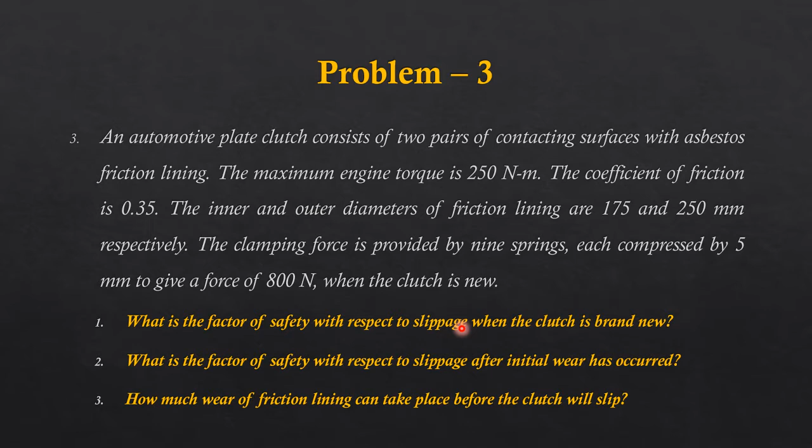The axial force or the force of engagement is provided by 9 springs. Each spring will deflect by 5 millimeter to give a force of 800 Newton, which is necessary to keep the clutch engaged. Right? And initially the clutch is new. Right, so for this problem we need to find out the three parameters, factor of safety for both brand new clutch as well as initially worn out clutch, and we need to find out the maximum wear before the clutch will slip. All right, so we will look into the data and then into the solutions in the next slides.

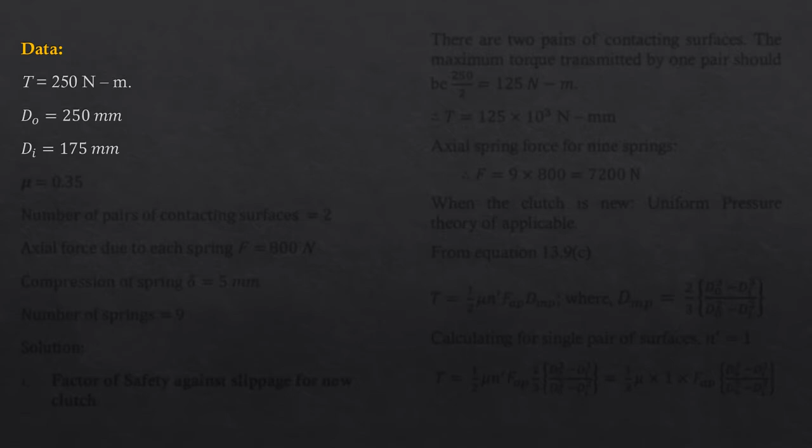All right, so let's look into the solution now. Data for problem number 3 is as follows. The torque that is transmitted is 250 Newton meter for two contacting surfaces. Outer diameter is 250 mm, inner is 175 mm. Coefficient of friction is 0.35, right? And the number of pairs of contacting surfaces is 2. And the axial force provided by each of the springs is 800 Newton. And deflection or compression of each spring is 5 mm. Number of springs is 9. So these are the data that we have.

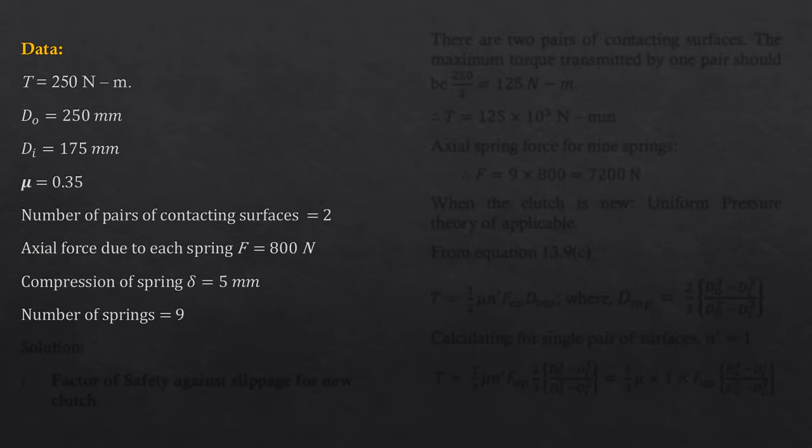Now let us look into the first parameter which they have asked us to determine, which is factor of safety against slippage for new clutch. Right, now before we solve the problem, let us look at how to solve this problem. Okay, now when you say factor of safety against slippage, factor of safety we know is maximum by induced, isn't it? Right? The maximum torque that can be transmitted for a single plate clutch is dependent upon both uniform wear or uniform pressure theory. But here they have asked us to find out factor of safety against slippage for new clutch. And we have learnt that for new clutches, it is uniform pressure theory that works well.

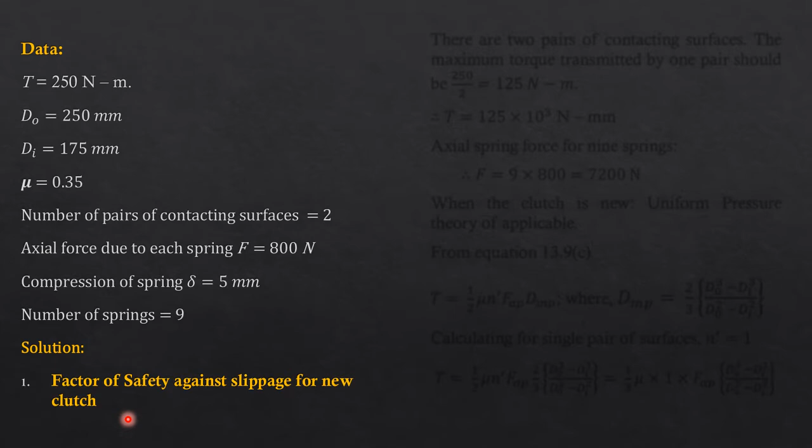Right? Therefore, we will use uniform pressure theory and solve for the torque carrying capacity of the clutch. Divide that by the torque that is transmitted, which in this particular case, for one pair of contacting surfaces, will be 250 by 2, right? So divide the maximum torque that is obtained using uniform pressure theory by the torque transmitted, and you will get the factor of safety, right? And if the factor of safety is greater than 1, we know that the design is safe. All right, therefore let us go through the solution now.

Solution for calculating the factor of safety against slippage for new clutch. Right, now as I was saying, the torque that is transmitted here is 250 Newton meter for two contacting surfaces. Therefore, per pair it will be 250 by 2, 125 Newton meter. That is the torque. And then each spring is supposed to exert 800 Newton of force. Therefore, for 9 springs, it will be 7,200 Newton. Therefore, you know the torque T and you know the axial force 7,200 Newton.

And since the clutch is new, we will make use of uniform pressure theory. For uniform pressure theory, we have a formula 13.9C, which is given here. Now substitute all the parameters here and you will get the value of the maximum torque transmitting capacity of the clutch, right? Now that we will calculate in the next slide.

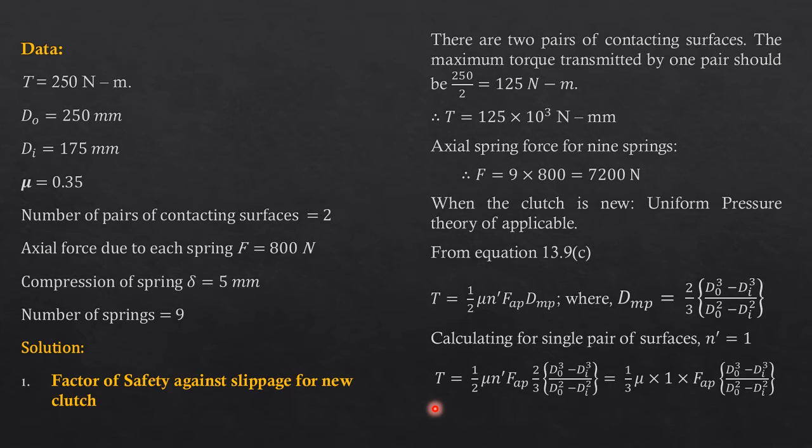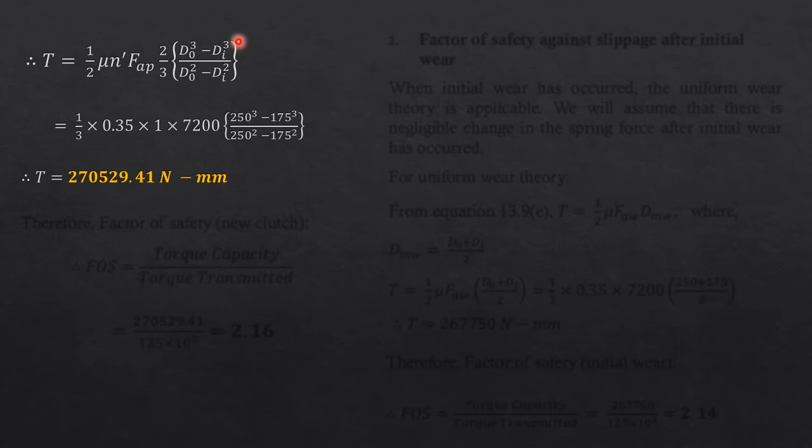All right, so now making use of the uniform pressure theory, we will calculate the torque as this value here. Right, now this is the torque that we have, 2,70,529.41 Newton mm. All right, so now if you will look at this uniform pressure theory formula, this is actually half mu n dash FAP into DMP, that is mean diameter. Right, I have merged both to obtain this formula here.

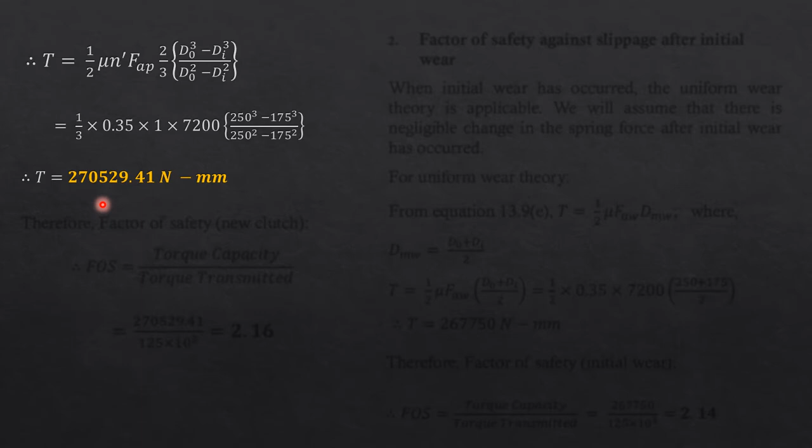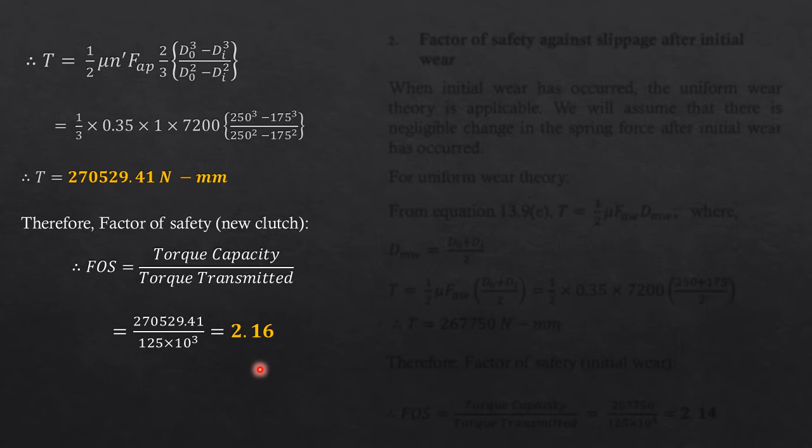Right, so you now have got the torque carrying capacity of the clutch based on uniform pressure theory. Now you can go ahead and calculate factor of safety. You will have to divide the torque carrying capacity by the torque transmitted in this particular case, which in the problem statement was given as 125 into 10 power 3 Newton mm. Therefore, divide both and you will get a factor of safety of 2.16. And since it is greater than 1, the design is safe. Therefore, this was factor of safety against slippage for new clutch.

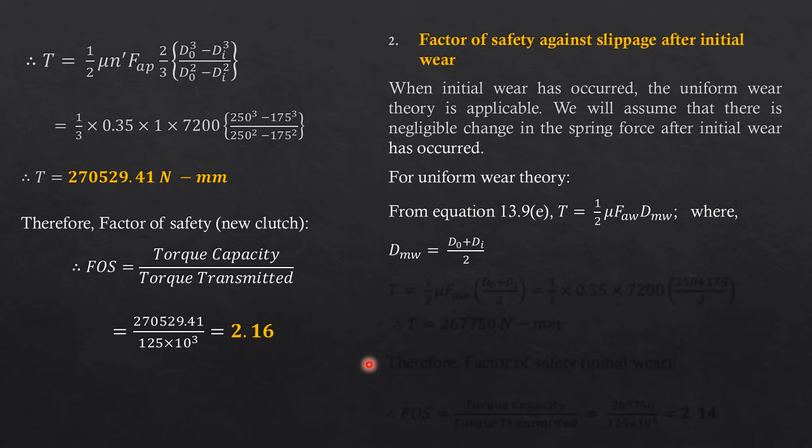Now, next they have asked us to determine factor of safety against a clutch which is initially worn off. Now, when the friction disc has initially worn off, then uniform pressure theory cannot be applied. You will have to make use of uniform wear theory now. For uniform wear theory, you know that the torque is given by this formula here, 13.9E, where DMW is the mean diameter, which will be the average of the outer and inner diameters. Substitute that and you will get a torque of 2,67,750 Newton mm, or 267.7 into 10 power 3 Newton mm.

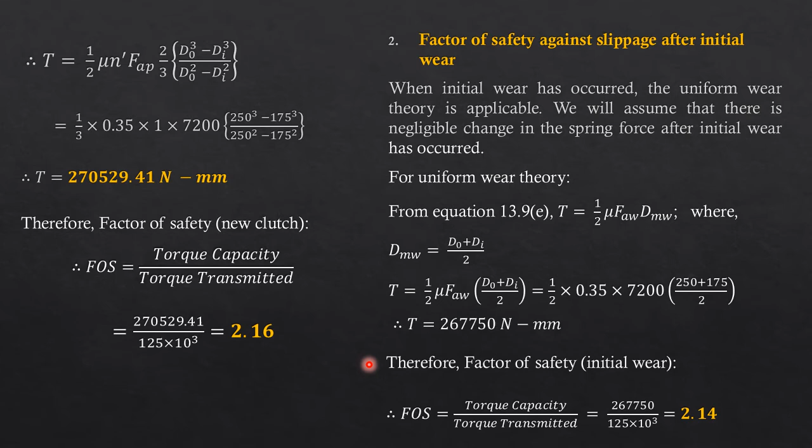Now you can find out the factor of safety. Divide 267.75 into 10 power 3 by the torque transmitted per pair of contacting surface, 125 into 10 power 3, and you will get the factor of safety as 2.14. Okay, so you have obtained the factor of safety for initially worn out case as well. And for both brand new as well as initial wear, you see that the factor of safety is greater than 1. Therefore the design here is safe. Now, third factor which they have asked us to find is what is the maximum wear before the clutch will slip. This we will solve in the next slide.

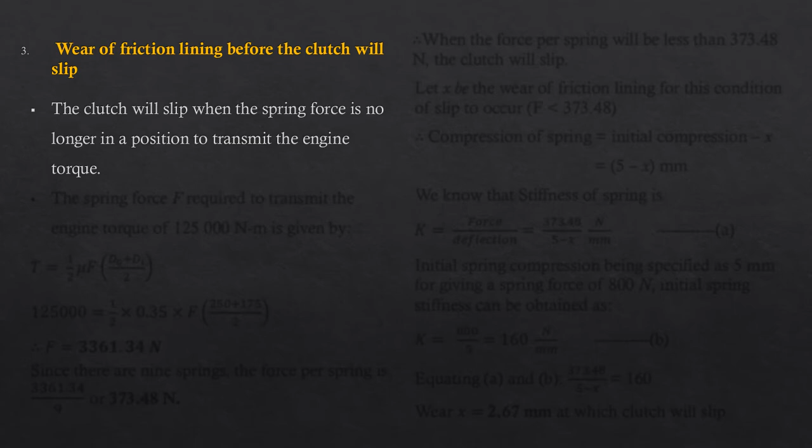All right, so the final aspect that they have asked us to determine is what will be the maximum wear before the clutch will begin to slip. We know that the clutch will slip when the spring force is not sufficient to keep the clutch plates engaged. Therefore, when the friction lining will start wearing out, then the spring force will become insufficient. Now, in this particular problem, the torque that needs to be transmitted is 125 into 10 power 3 Newton meter. Sorry, there is a small mistake here. It is 125,000 Newton mm. So the unit is wrong here. Please take care of that.

So we have got the torque formula for uniform wear theory as follows. Now torque we know is 125 into 10 power 3 Newton mm. Now to transmit this torque, what is the axial force or what is the spring force needed? We can solve for F. If you will solve for F, you will see that you need 3361.34 newtons of spring force to make sure that the clutch plates are engaged and it is able to transmit the required torque value. Now, this is the force that we need from the springs.

Now, since in this problem statement they state that we make use of 9 springs, force per spring will be the total spring force divided by 9, which is 373.48 Newton. Now, when will the clutch begin to slip? When the spring force becomes smaller than 373.48 Newton, there will be slippage. And how much wear can the clutch plate undergo before it slips? That is what we need to determine. As I said, when the spring force per spring will become lower than 373.48, the clutch will

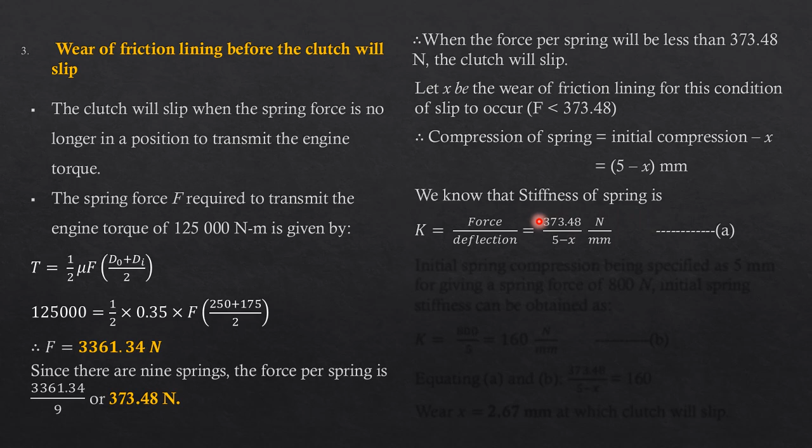Now initially for a brand new spring, the compression was 5 mm to give a force of 800 Newton. Therefore, the initial spring stiffness is 800 by 5, which is 160 Newton per millimeter. Now, to determine X, I will equate A and B, and I can solve for the wear X, and you will get it as 2.67 millimeter. Therefore, if the friction liner wears out by 2.67 millimeters, then the spring force will not be able to keep them engaged, and the clutch will slip. So with this, the problem is solved.

So we have so far solved three problems on single plate or single disc clutch. From the next video onwards, we will start to solve problems on multi-plate or multi-disc clutches.